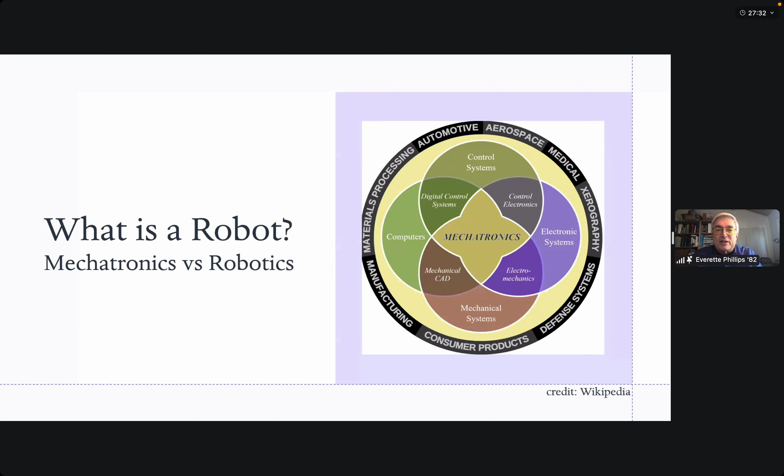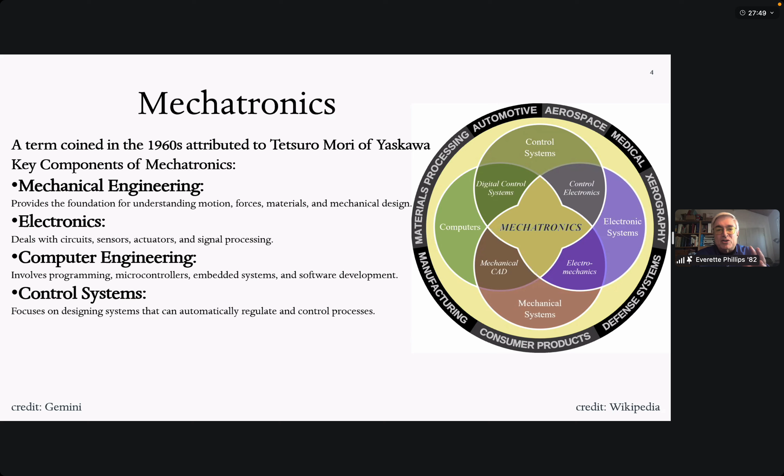So to start off, we have to just discuss mechatronics, because mechatronics and robotics are related to one another. Mechatronics is the superset. It was a coined term from the 1960s, from Yaskawa. It's really this convergence of mechanical engineering, electrical engineering, computer science, control systems. It involves everything from CNC machines to any device that's using these different technologies. So while all apples are fruit, not all fruit are apples.

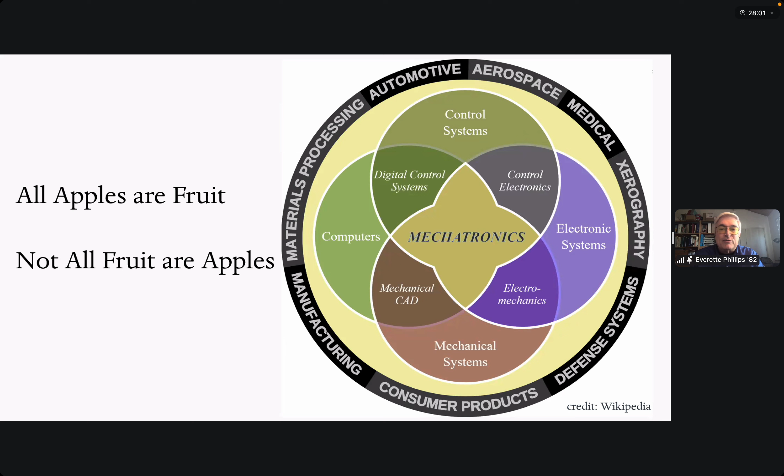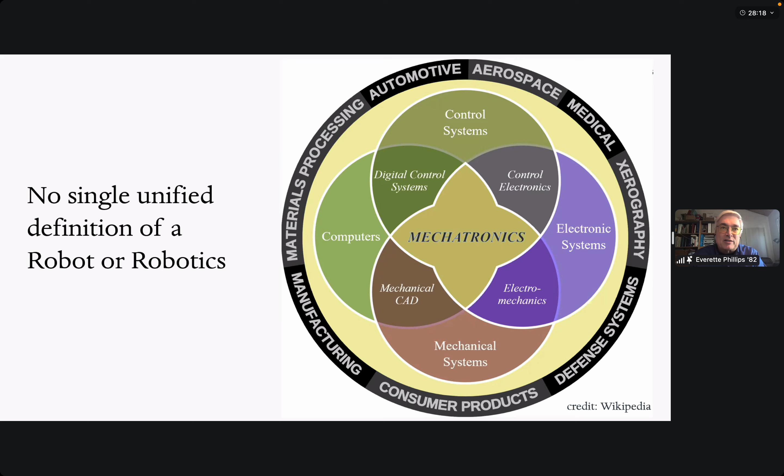And this is where robotics come in, because there's a lot of confusion between robotics and mechatronics. But there's no single unified definition of robotics. This is a problem if you want to tax them, or if you want to have tariffs on them, because there are a lot of mechanisms that for marketing purposes people call robots but aren't really robots. So the term robot came from a play in the 1920s, a Czech play where it was about these automated pieces of equipment. Robota is a Czech word meaning forced labor or servitude or drudgery.

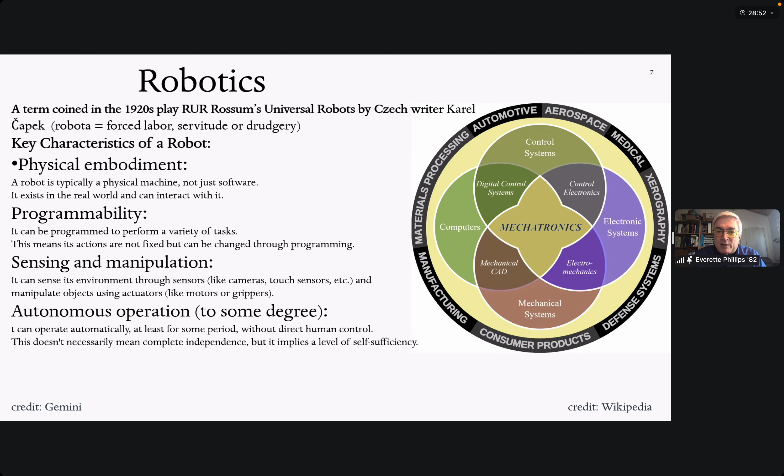Today, we kind of look at robotics as having key characteristics of a physical embodiment. So not the software robots you hear about running around the web. Programmability, it could be doing a bunch of different tasks. It has sensing and manipulation capabilities and autonomous operation to some degree. Now, one type of robot that actually has a definition is an industrial robot. The industrial robot is automatically controlled, reprogrammable multi-purpose manipulator, programmable in 3 or more axes.

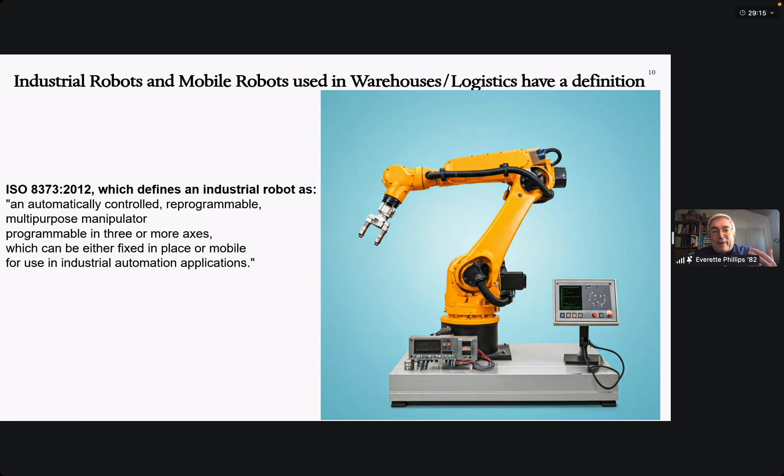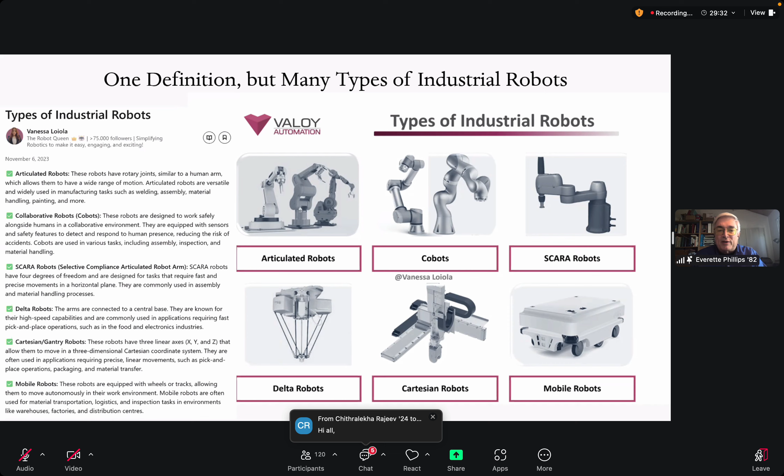It can be fixed or it can be moving. There are many different kinds of industrial robots - articulated, SCARA, Delta, Cartesian. It's not necessary to go into all of them, but just so as we talk about the term industrial robot, you have an idea of some of these different looks. There are even dual-armed robots where two arms are working together. It's kind of fascinating to see them working together.

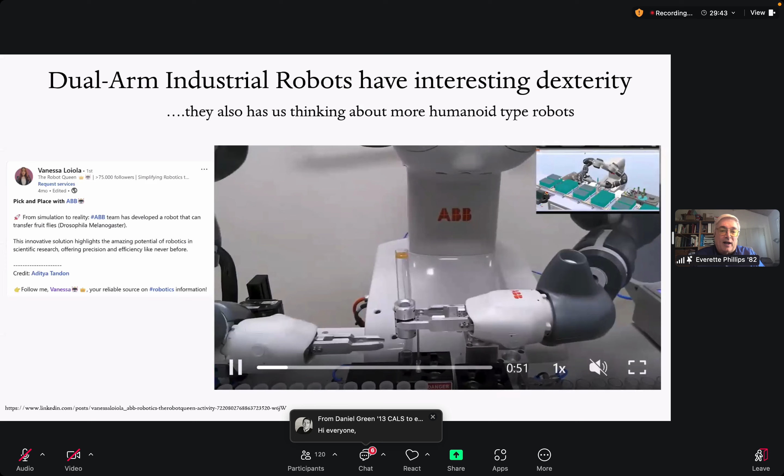This is not artificial intelligence. This is regular programming using a CPU - nothing, I mean it's special, but not AI special, right? So I really want you to understand that robotics has advanced a lot in capabilities without AI.

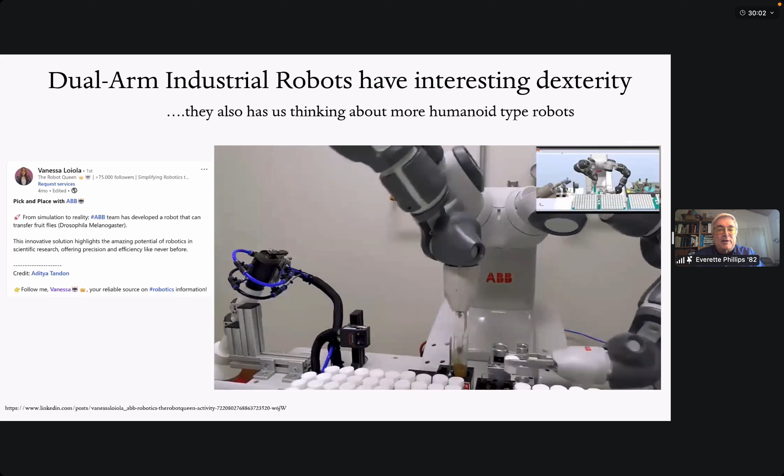The robots started in the 1960s. In the 70s they started to become more available, but really it's the late 70s, early 80s where they started to really take off. In my opinion, you had Fanuc, Yaskawa, Kuka, ABB - people who made CNC machines, controllers, things like that - had an advantage, and they've grown common robot companies today.

Then there were large internal users like Toshiba, Seiko Epson, Denso, Kawasaki. These people needed equipment internally, so they developed a robot to use internally, maybe hundreds or thousands of them, and then sold them to the outside market. So that made entrepreneurs struggle. In the early days, there were robots like Puma, Merlin, and then recently Rethink. They died because they didn't have enough internal skills or capabilities, enough volume to be able to compete with people who were really just selling excess.

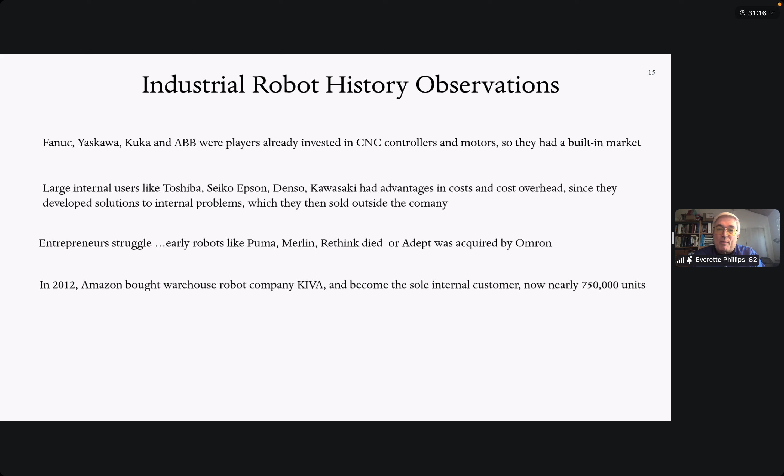Adept is a company that did very well in the 80s, 90s, and early 2000s, but was eventually taken over by Omron. In 2012, Amazon bought a robot company called Kiva, used it internally. Today, 750,000 of those robots are in use in Amazon factories.

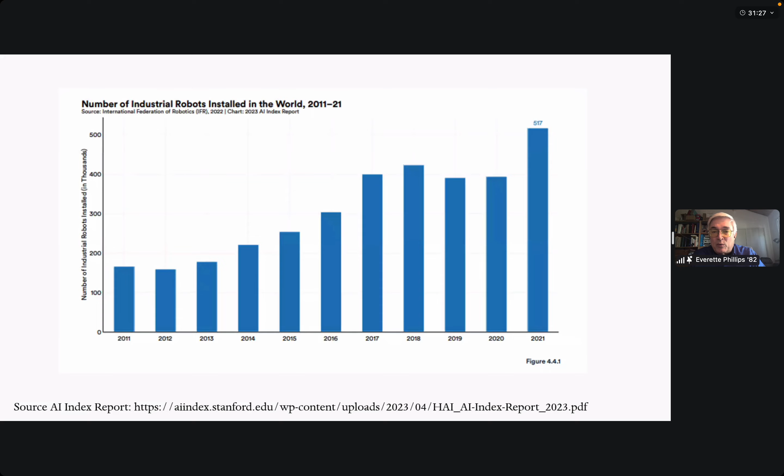So where does that place us as far as robots worldwide? There are 517,000 robots sold in 2021, which is the last year I have data with, but you can see the trend over the prior decade. That means there are about 3.5 million robots operating in facilities at this time.

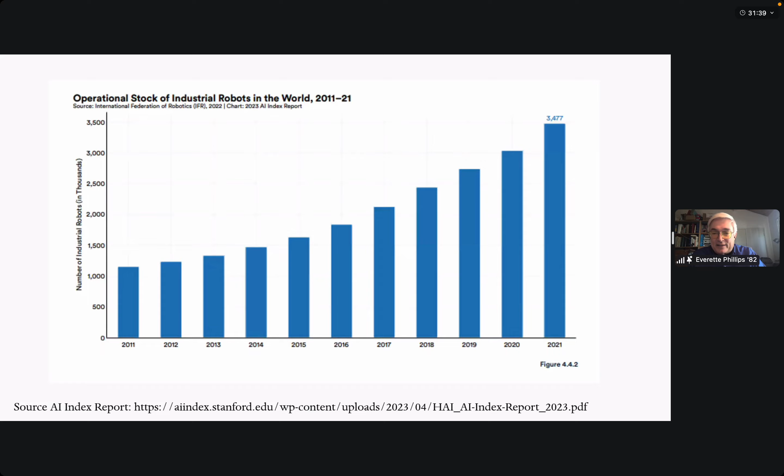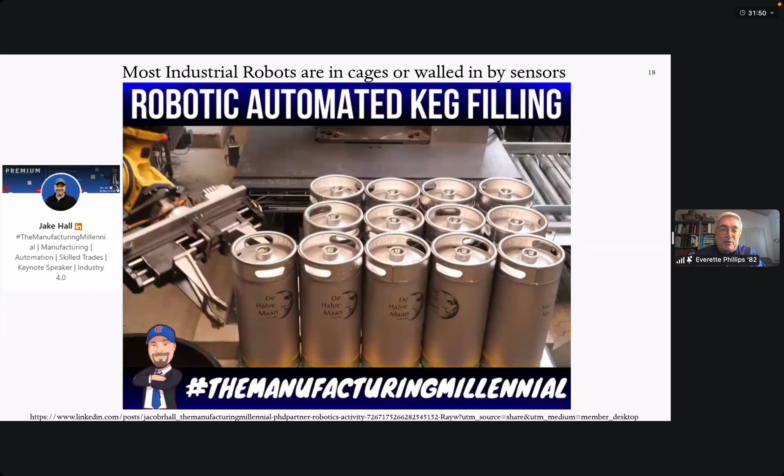When we say industrial robots, there are cages around them usually. There are sensors. There are things that prevent people from interacting with robots. This has been really the trend for 30, 40 years.

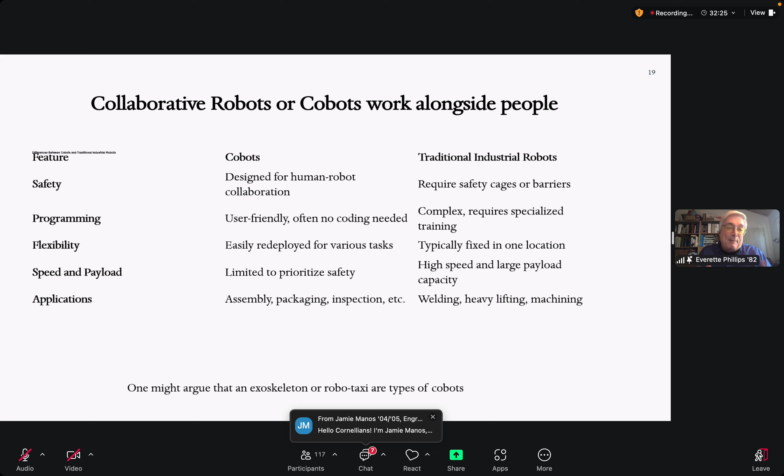In the last decade, there's been the evolution of something called a cobot, or collaborative robot. They're similar to industrial robots, but they've been adapted so that they don't hurt you as much. I mean, they still can be dangerous. It's interesting that we're putting them next to people because you wouldn't allow a coworker to punch or hurt their coworker and not go to HR. But you have these robots that physically can bump and hurt, bruise. They won't kill. Part of the reason is they move more slowly and have lighter payloads, like 10 or 12 kilograms. But when you get up to 50 kilograms, that momentum alone can hurt someone.

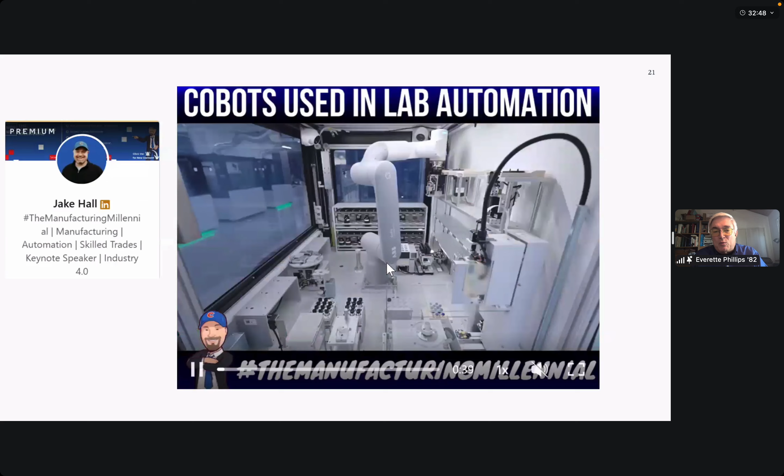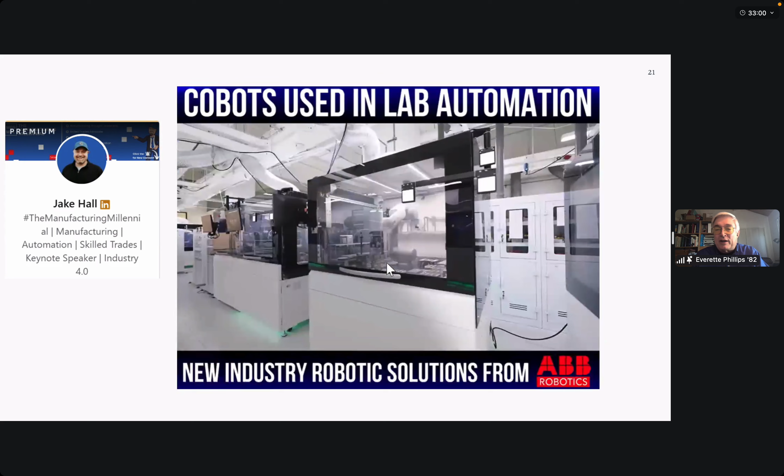So you have to do a safety evaluation before you can allow the robot to be just working next to somebody. One way is to allow the robots to be outside and inside different containers. So this robot's in a barrier, it's a cobot, but outside of the barrier there are other cobots that are interacting with people, moving around.

Those robots move a little slower, but this is a new trend, this cobot. How much of a trend? Well, of the 517,000 robots sold, currently 39,000 of those in that year were cobots. So it's growing year by year. Teradyne bought Universal Robots because Universal has a lot of this technology. So it's something you're going to see and hear a lot more of. Exoskeletons that you hear people talking about are kind of a cobot that you get inside of. One can argue that actually the Tesla on auto drive is a cobot that you sit inside of.

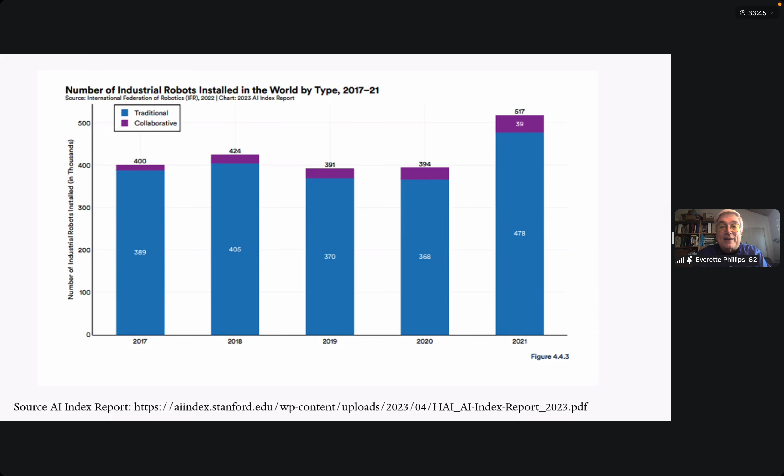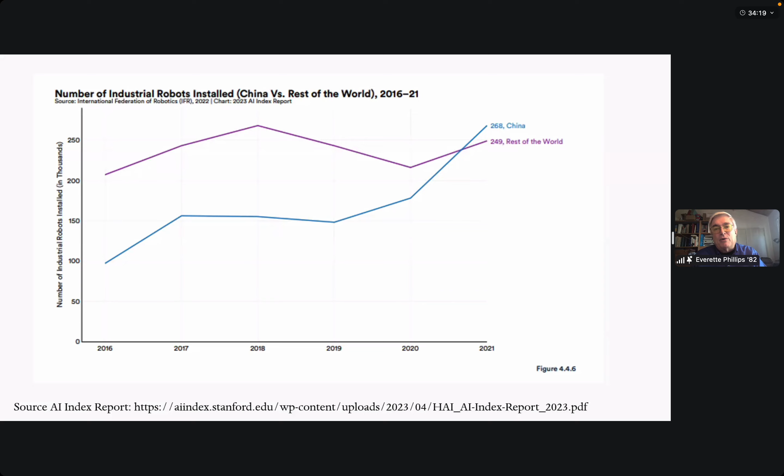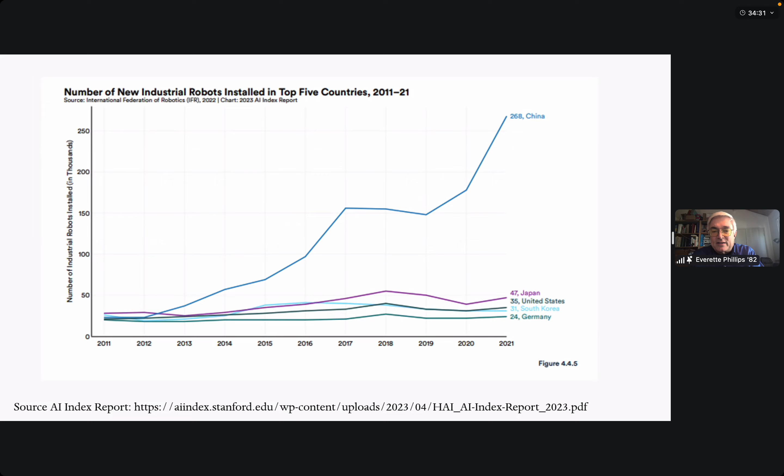But if you look at the density of robots per worker, the Republic of South Korea is a much larger portion. Then comes Singapore, then comes China, then comes Germany, then comes Japan.

You see the trend is industrial countries with a small population need a lot of robots per person, and countries that have high labor rates need a lot of robots per person.

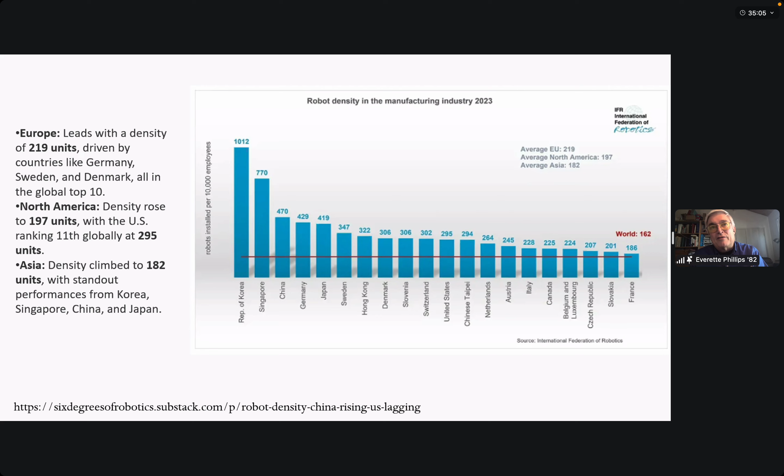By industry, robots are divided into automotive, electronics, food, metal, and machinery. Automotive is very heavily the big robots that move heavy things around. Electronics tend to be the smaller robots that move things around.

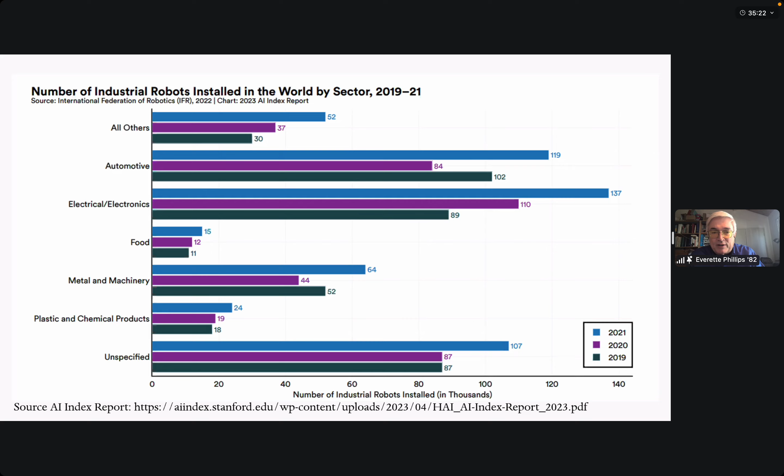The technologies related to robots that are important to understand, at least for discussion now, are inverse kinematics. This is the mathematics behind getting a mechanism to go to a specific spot in space. Spatial computing is the ability to assign data to three-dimensional space and then operate in that space. And then digital twins, which is a simulation virtual version of a machine that behaves like the machine. So you can actually write programs on the virtual version of the machine and then just download them and run the actual machine.

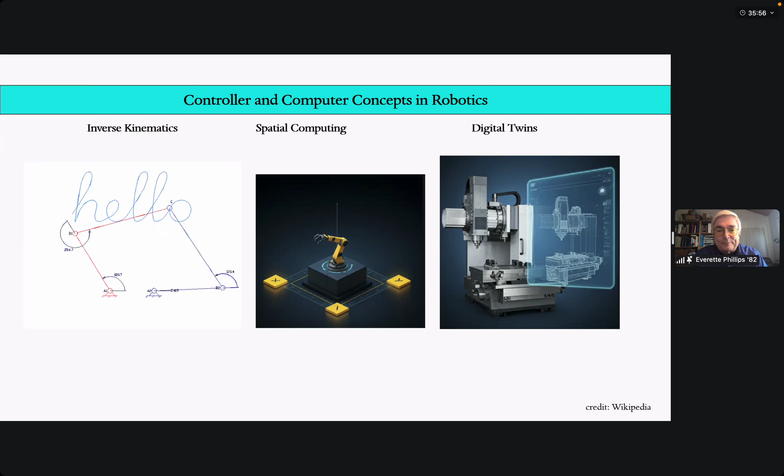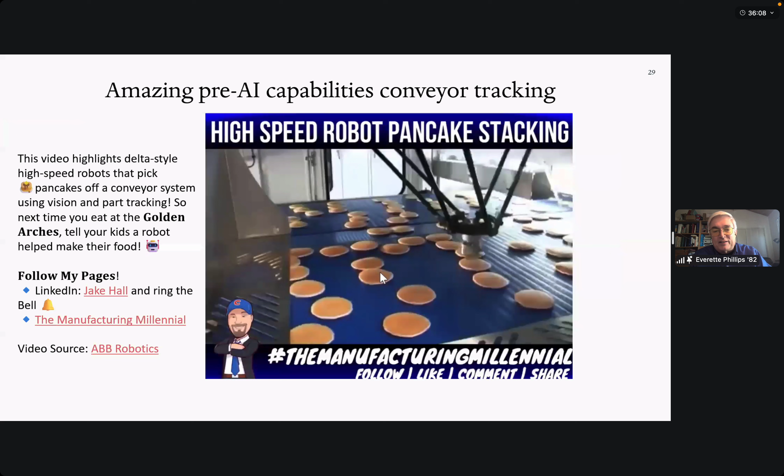But robots without AI can still do fantastic things. Here's an example of a robot with vision. This is a Delta style robot. It's moving from above, using vision to pick off a moving conveyor, objects, pancakes in this case, and then place the pancakes into rows of 3.

So what's going on with AI and robotics merging together? This is called convergence. Convergence leads to exponential technologies. Why? What's happening is costs are being reduced and capabilities increased, which then allows the technology to be deployed into multiple new industries and uses.

The problem for business people and investors is that we are very linear thinkers. What we do is look at 10% increases, 30% increases. We can deal with that year to year. We know how to inventory for those things. But exponential growth is something that we as humans have difficulty dealing with. That's one of the reasons why we have trouble with diseases. They grow so fast because they grow exponentially, and we're caught unawares because we don't know how to deal with exponential growth of anything.

But this creates opportunities, because that means that current players cannot foresee a need, and that creates a gap. That gap allows opportunities for investors and for others to get involved with.

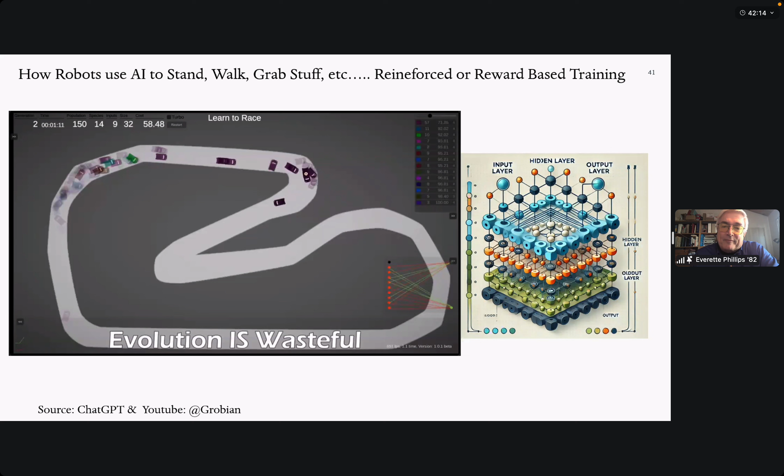Reinforced learning is where you don't have tagged data. You have boundary conditions, but you're not telling it what to do, it's learning. A good example is in these hidden layers: say you have a car that you simulate going around a track. The car can go forwards, backwards, right and left, so it can only do certain things. Then it knows the walls are around it by sensors, so you don't tell it, it just can't go anymore when it hits a wall. It generates 100 different permutations of these inner layers, and the car moves along, and when it hits a wall...

You choose the ones that kind of accidentally go around a wall, you tag it, and that freezes those hidden layers. Then it generates 100 new programs, but based around that new proximity. You keep repeating that, and eventually you get a car that can go around the track. On the track, there's one car with a donut, that's the one that was successful from the prior time, the base of the hidden layers that all the new permutations came out of. So you have these permutations, you choose the best, over and over, and eventually you have a model that will allow a robot to stand, or pick things out of a bin. It's not a program per se.

This is one of the challenges when people say, well, you should build in ethics, or you should build in certain capabilities, or you should have a stop button. There's no place to put a stop button. There's no place to put it, because it's this organic process, if you will, of the system learning how to do a certain task.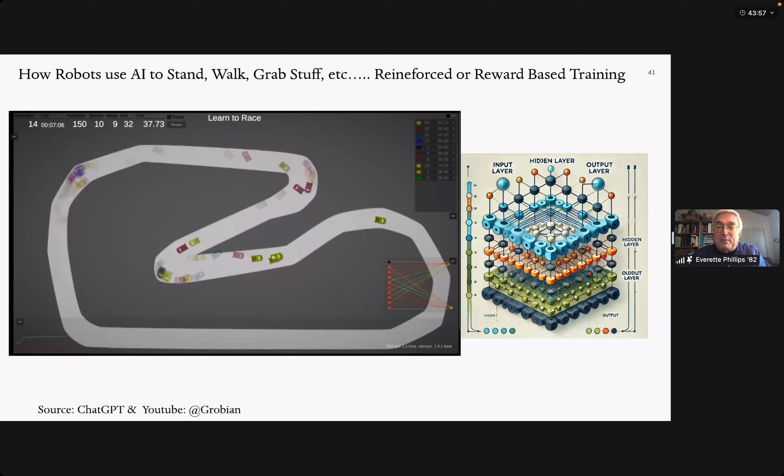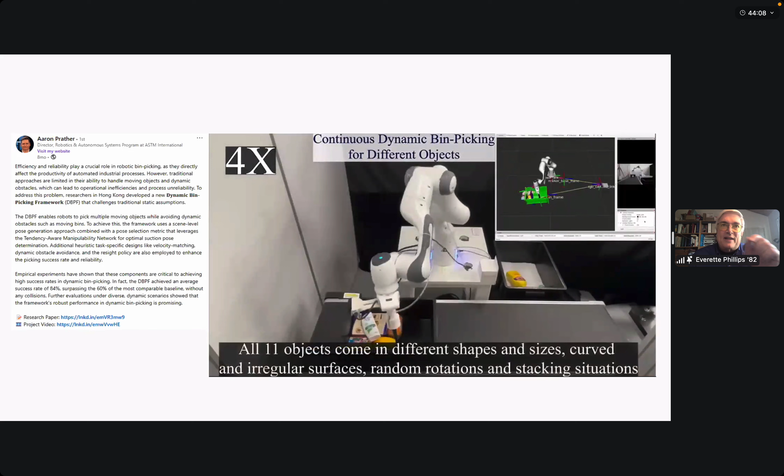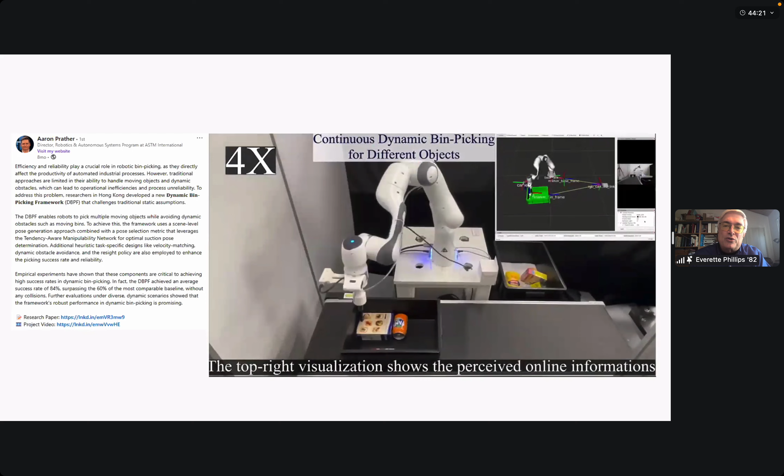One of the things robots first started using AI for is bin picking, because it's too hard to program pick up this, get this, do this, when the objects are mixed up together in a bin with different shapes and sizes. So the robot has to learn over time how to approach certain objects, how to identify them, and how to pick those objects up. Bin picking is one of the first AI-based applications being proliferated in factories and robotics.

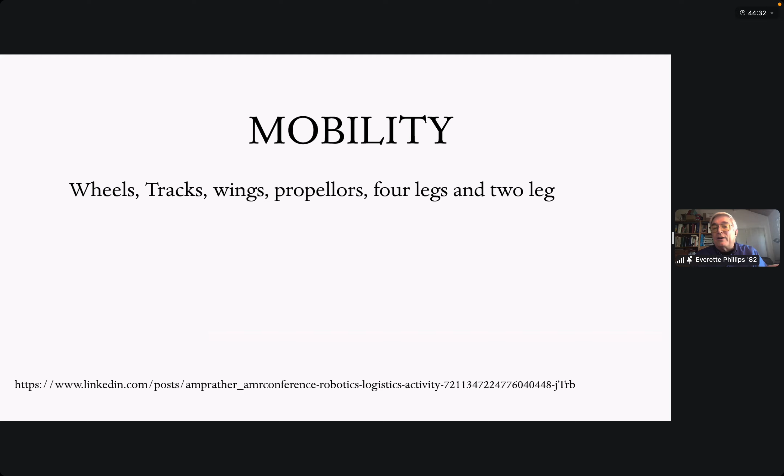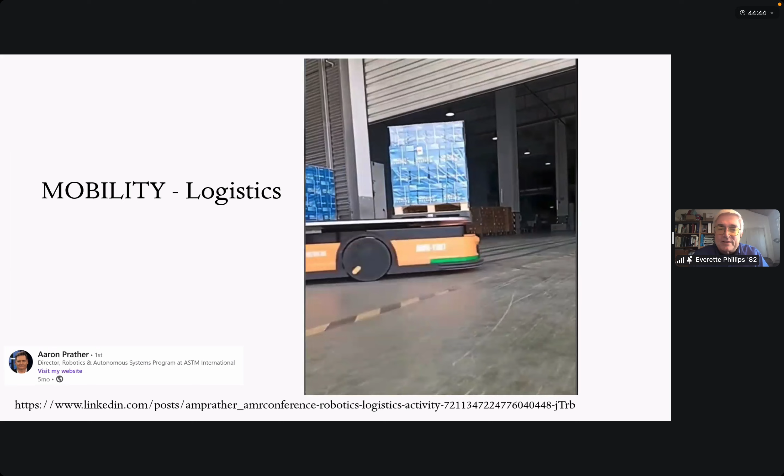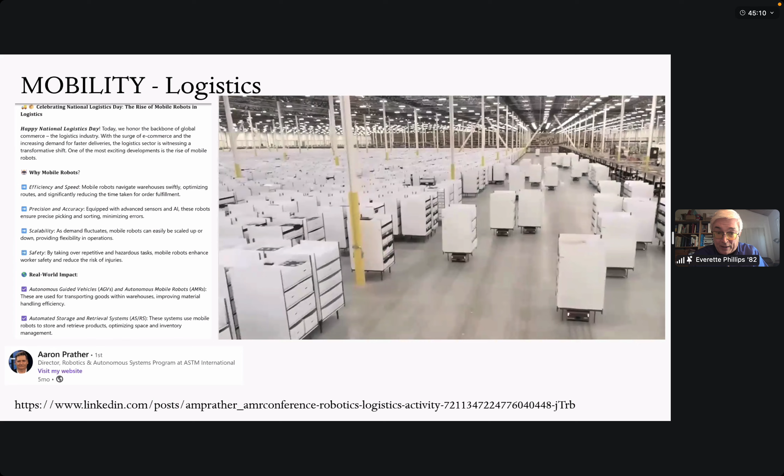The other area happening is mobility. In logistics, you now have mobile robots that run around, pick up pallets, unload trucks, and move all around warehouses on their own, with a certain set of rules, but they've learned how to work together without bumping into one another. It's amazing to see all these different mechanisms running around with the equivalent of air traffic control guiding them, each one with their own intelligence, each one knowing what to do. Amazon has 750,000 robots like this.

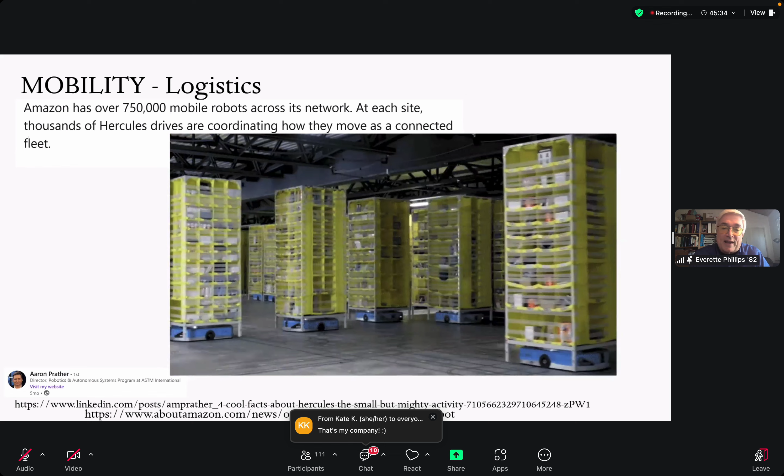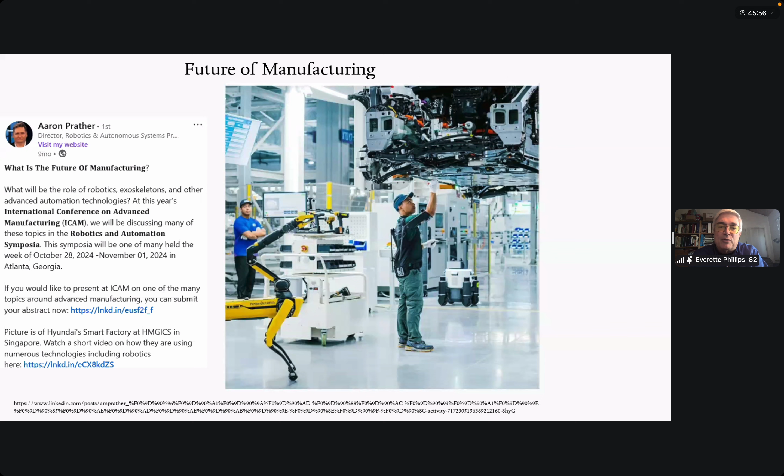These aren't robots with arms, they're robots picking up items from underneath, moving carts around and distributing them so your package can be loaded with what you want when you order on Amazon. Nimble Robotics, Fetch Robotics, GreyOrange, Locus Robotics, Vecna, all these companies are getting involved in this robotic fulfillment system business, and it's growing. The future of robotics and manufacturing includes exoskeletons like the one this gentleman is wearing, mobile robots that walk around, robots that build things, robots that put in glass. But new markets are coming, like loading and unloading trucks, inside the truck, farming and agriculture.

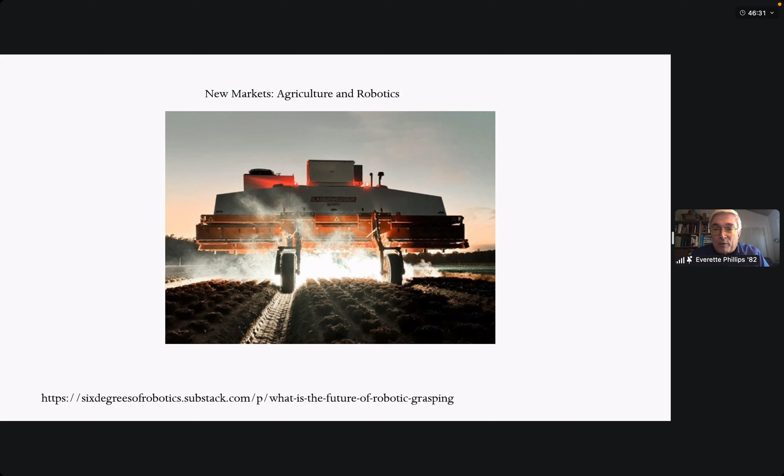These robots now walk around or drive around a field, laser trimming weeds from good product. The robot is able to identify, as it goes down, what's a strawberry plant or a plant the farmer has planted, versus what's a weed, and it zaps the weeds with a laser. It's an organic way of farming, which is what people want, you don't have to use chemicals to get rid of the weeds.

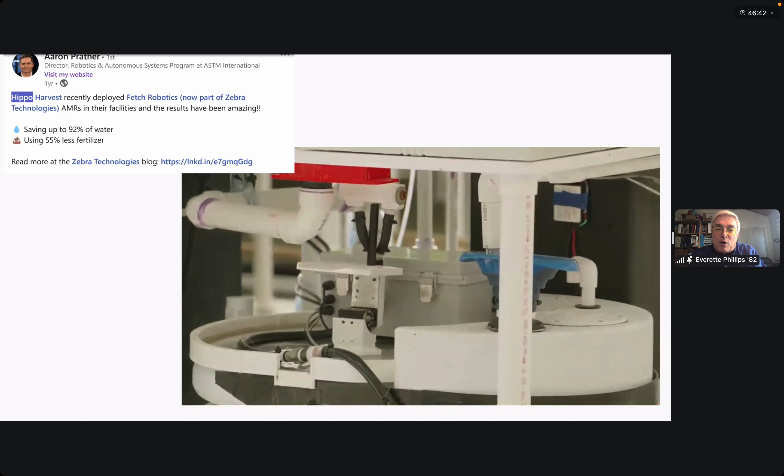There are also robots that actually tend and run whole greenhouses. This robot fills and waters the different pallets, picks up pallets and moves them into the central area to be harvested.

These are the kinds of things that can be done when AI is merged with robotics.

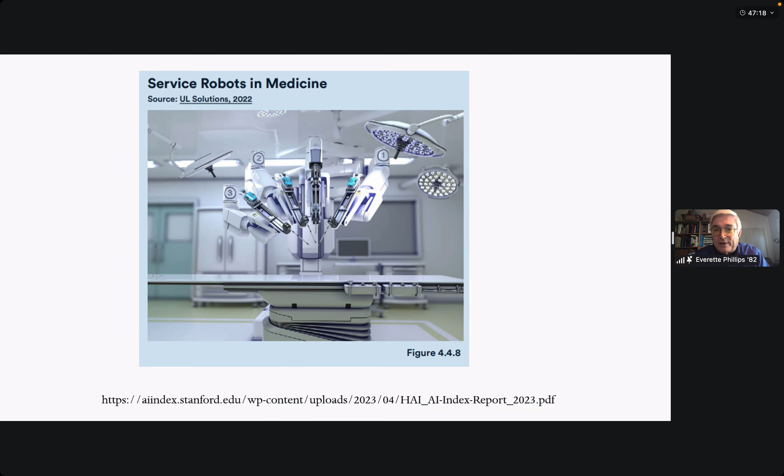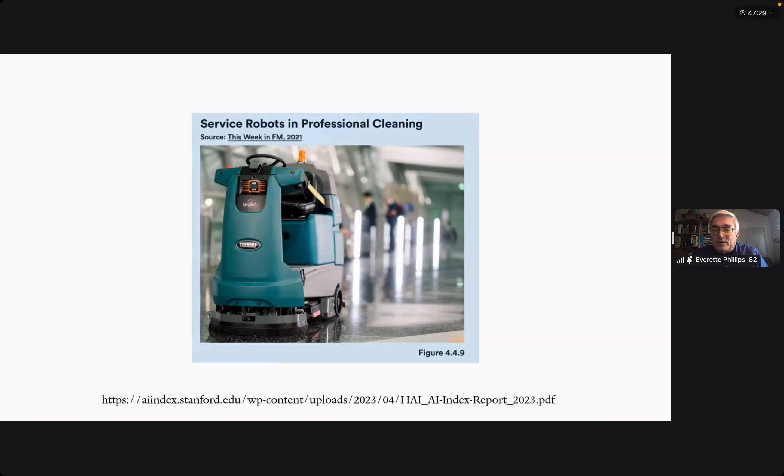Robots are entering services like medicine. Surgical robots have been around for a while, but AI is adding new skills and capabilities where robots are able to now basically put a suture in a grape. They're that refined in what their capabilities are able to do. They can interact with people, feeding people with disabilities. They can clean, and they can also do maintenance, construction, bricklaying robots.

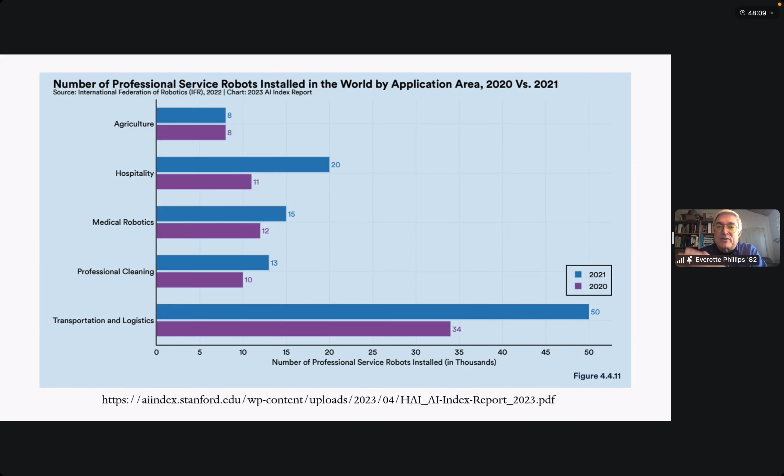We're expanding into a lot of different areas. How much? It's still small markets. If you look at 2020 to 2021, you had only 8,000 new robots placed in agriculture. There was barely any new ones, so there was no growth. There are 8,000 robots in agriculture. In hospitality, it almost doubled. In medical robots, it's been going up. So we're talking 15,000, 8,000, 50,000 compared to 550,000. These are relatively small markets.

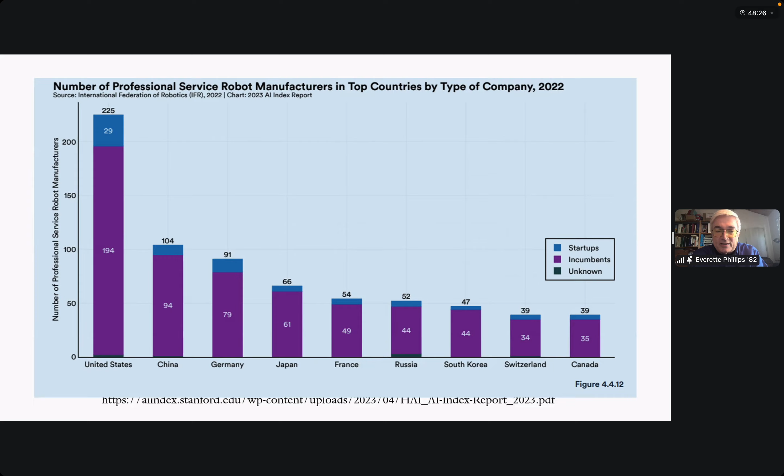But this is an entrepreneurship area, an opportunity. And if you look at who has the startups in this area, the United States is really leading, with China second, Germany, then Japan.

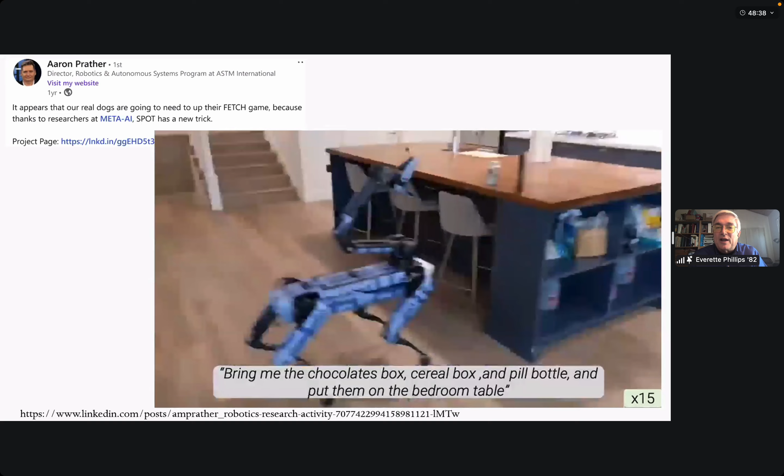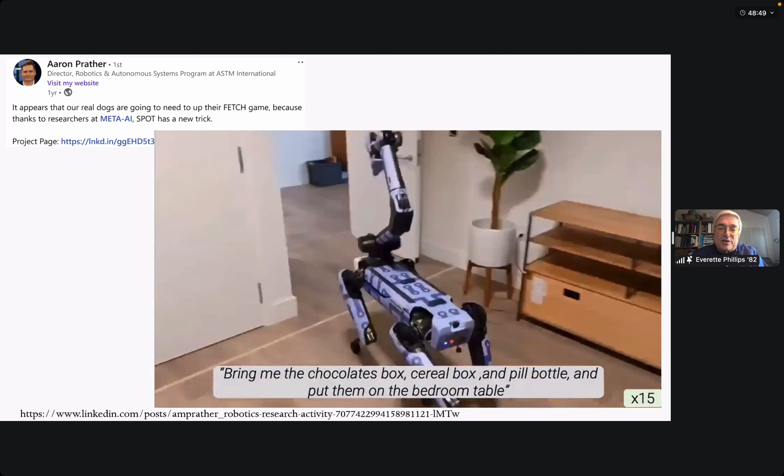So robots can do stuff now like being told, pick up a cereal box from the table in one room, bring it to another, and put it down. Bring a pill bottle, go and pick it up and bring it on their bedroom table. These kinds of things are not necessarily being fully deployed in the field yet, but they can be demonstrated and they're actually happening.

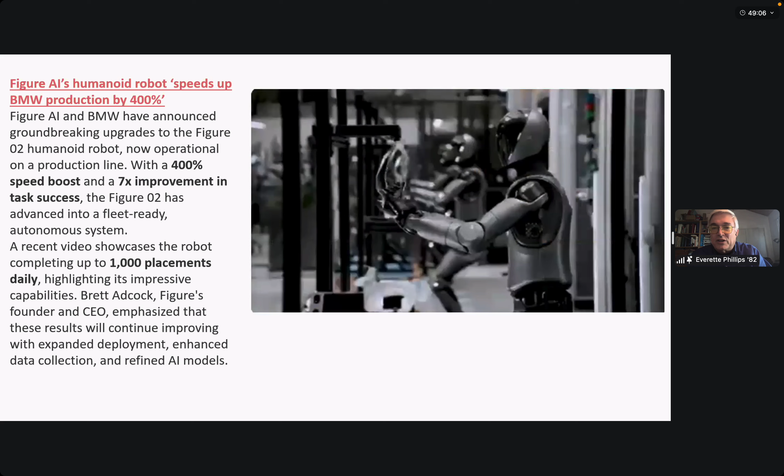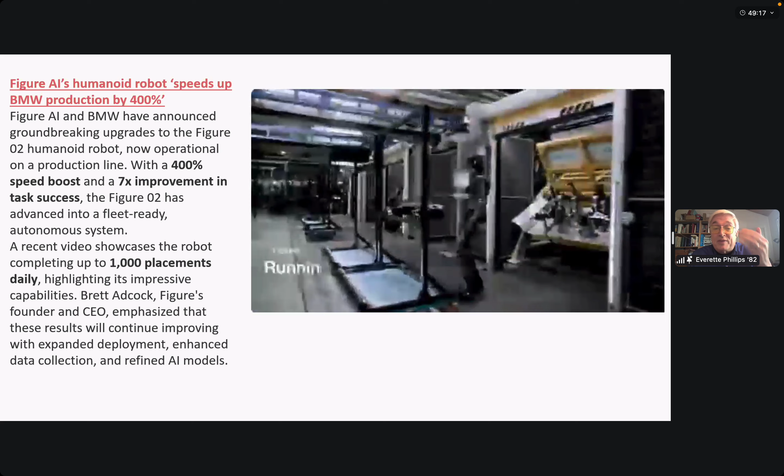What's in the field already is robots, humanoid robots like these that are inside a BMW facility, actually loading and unloading machines. They claim a 400% speed boost and a 7-time improvement in task success, with 1,000 placements daily. So humanoid robots actually running in a factory. This is happening now, today.

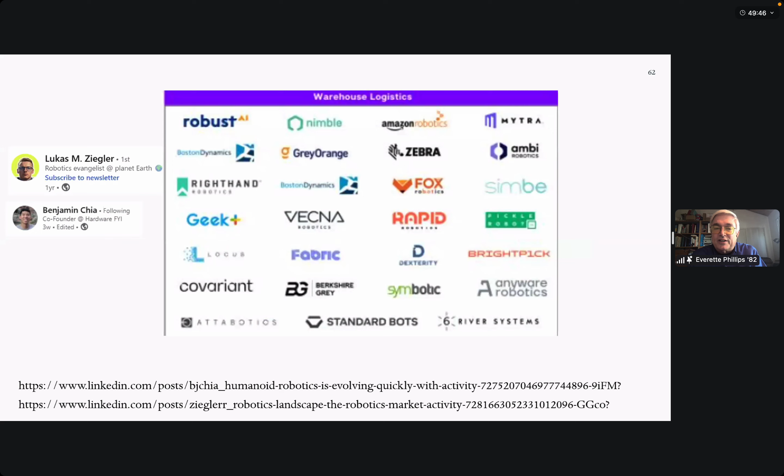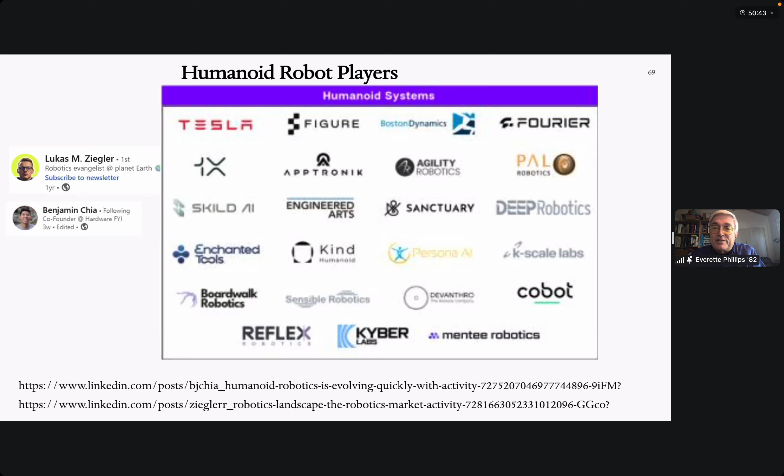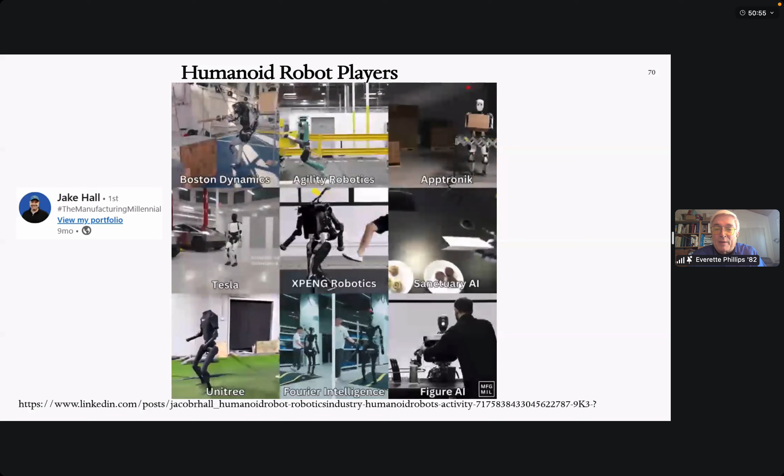And then humanoid players. The proliferation of humanoid players is just utterly fantastic, with different styles, different types. Boston Dynamics was one of the leaders, and we've seen it evolve over time. But with the combination of neural networks and the training that's available, more and more people are entering because the barriers to entry are getting smaller.

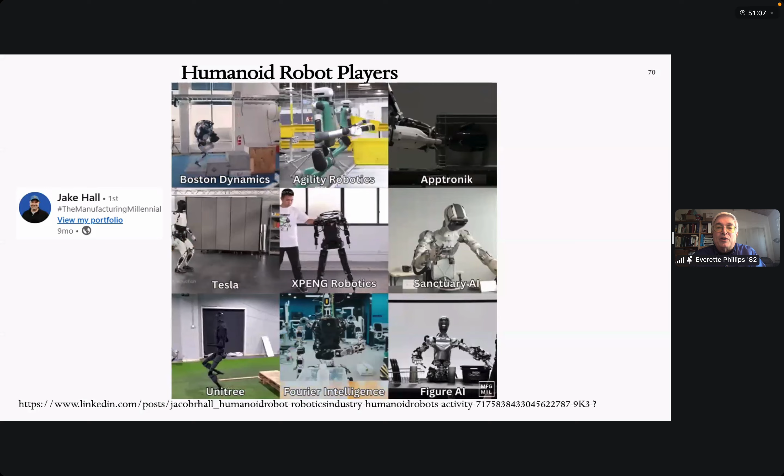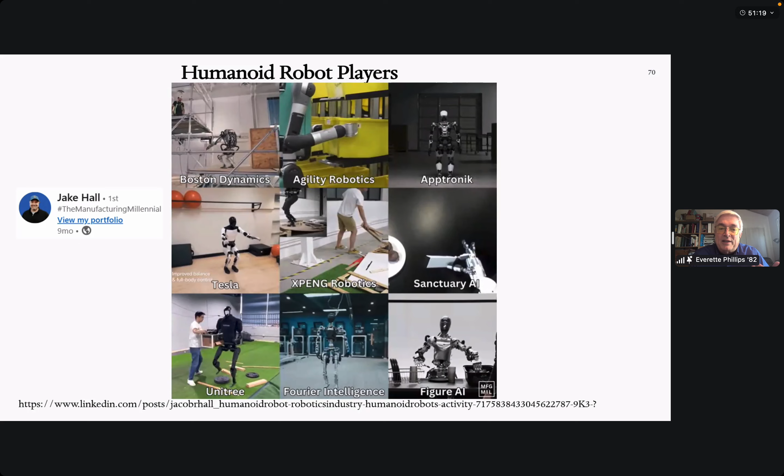And you can blame NVIDIA, because NVIDIA just released hundreds of thousands of hours of training for humanoid robots. They're very dedicated to being the supplier of the technology of humanoid robots, in addition to LLMs like ChatGPT and stuff like that.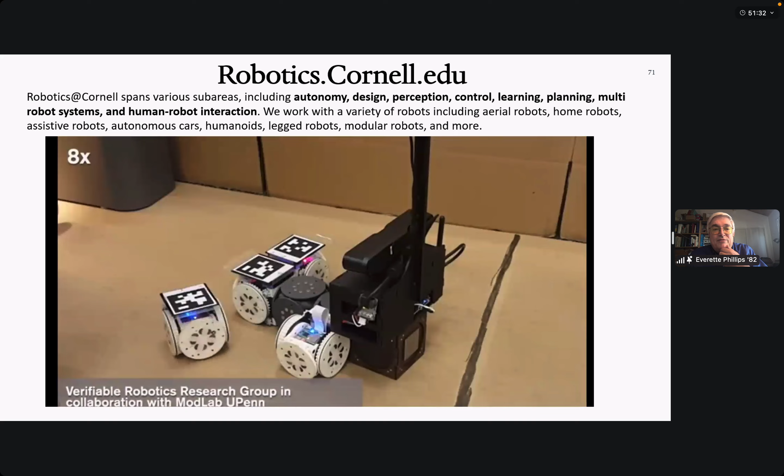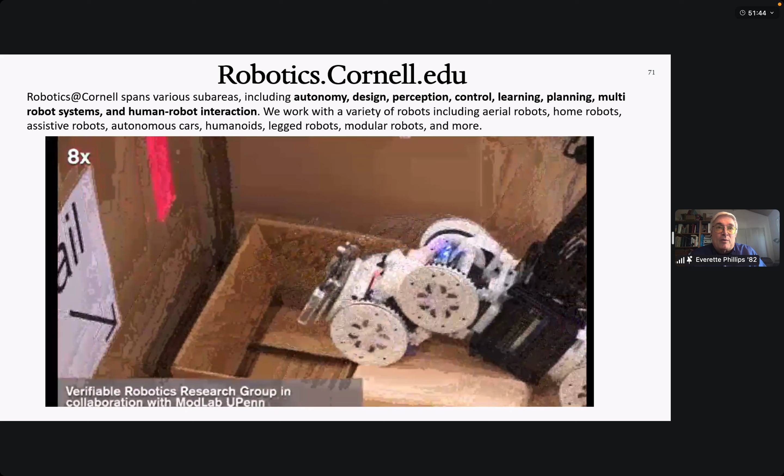So just to finish up, just to introduce you, Cornell is not being left behind in robotics, although I was scared they were. In the 1990s, I had $300,000 in robot arms that I wanted to donate to Cornell, when I was general manager of one of the companies I worked for, and I called and they said, no, sorry, no professors interested in robotics at the moment. So I had to donate them somewhere else.

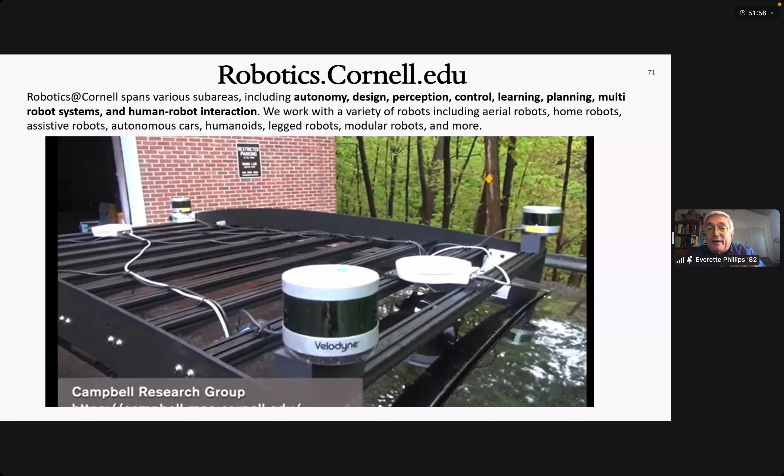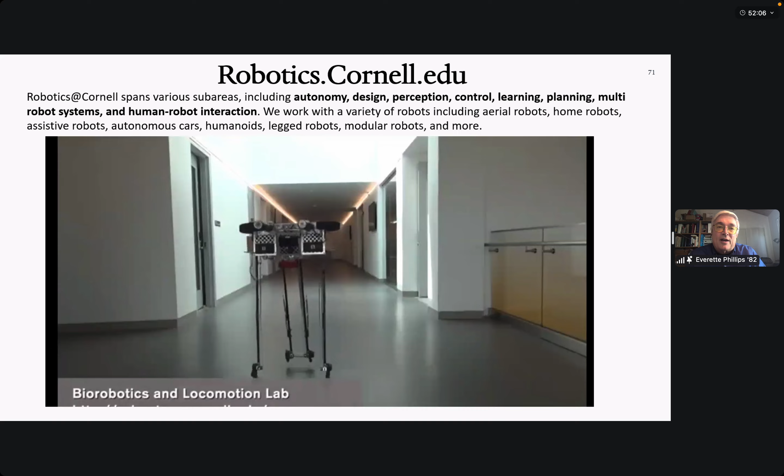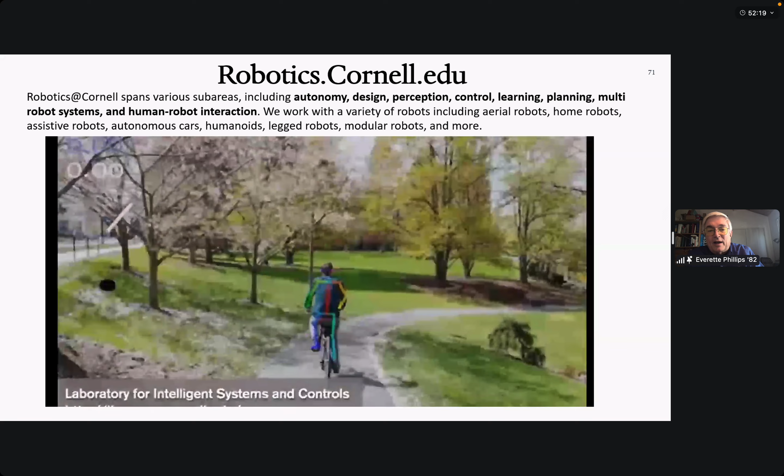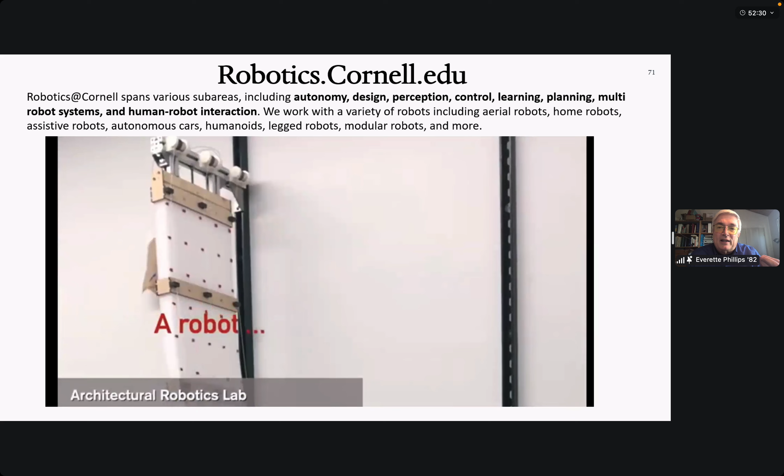But since then, we've been doing a lot of work. I think part of that is we have newer, younger professors who are more entrepreneurial and looking at these different capabilities and are excited about the application of technology. At the time I graduated, a lot of the teachers were more focused on theory, and the application of technology was not necessarily where their heart was. But with Stanford growing and competing in the world the way it is, with entrepreneurship, it's really changed the way Cornell looks at these things and what we're doing in robotics at Cornell.

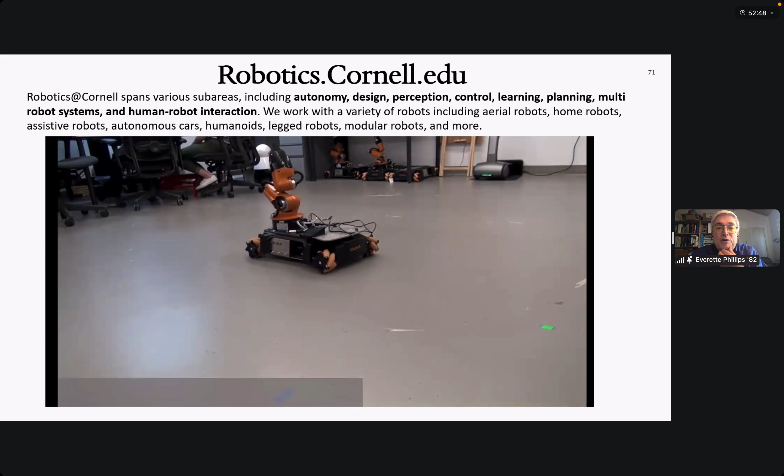You can go to robotics.cornell.edu and see some of the things that they're working on.